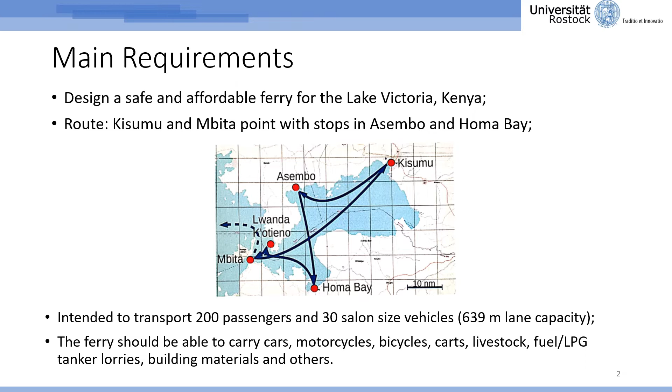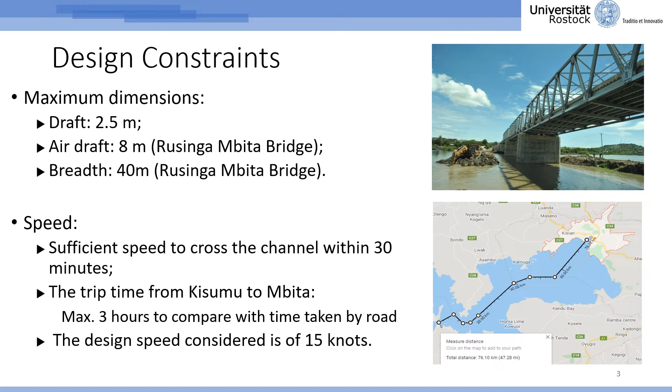Some restrictions also come from the lake infrastructure: a maximum draft limited to 2.5 meters, a maximum air draft and breadth of 8 and 40 meters due to restrictions of the Rusinga-Mbita bridge. The speed of the vessel should be enough so it will be an efficient alternative to the conventional roads. Thus, the design speed has been considered 15 knots, taking into account the accelerations and decelerations of the vessel.

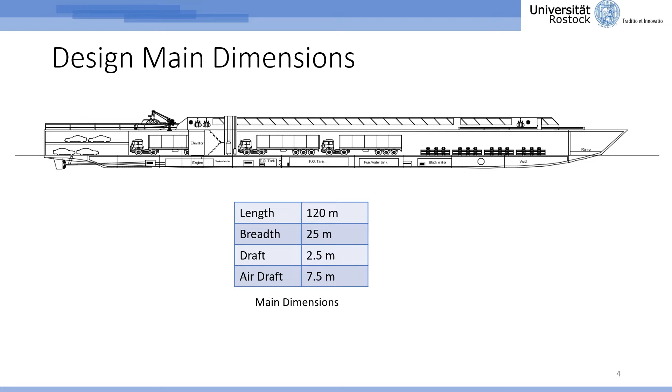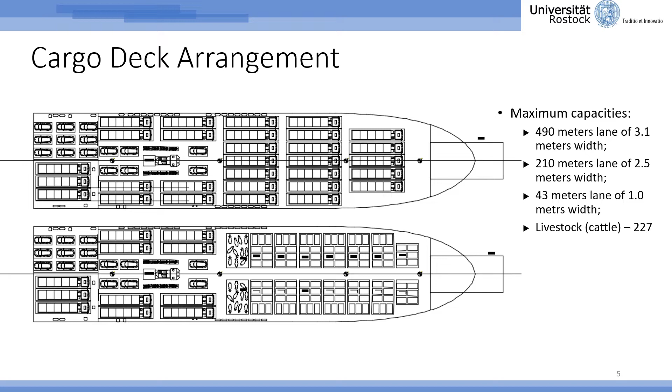The main dimensions were selected according to existing vessels and with the configuration that allowed a multiple-purpose cargo configuration. The vessel length is 120 meters, 25 meters breadth, and 7.5 meters air draft. The cargo deck allowed different configurations to be achieved. In the upper picture, a configuration is exemplified where mostly trucks are transported, and for the lower, the cargo deck has been adapted for transporting livestock, which could also be utilized to carry bulk materials, as an example. Thus, the flexibility of the cargo configuration improves the financial benefits achieved by the ferry.

A hoistable intermediary deck is present in the aft part of the vessel to be utilized when a larger number of smaller vehicles are being transported. This additional feature allows a larger cargo area even when the ferry is fully loaded with leisure passengers.

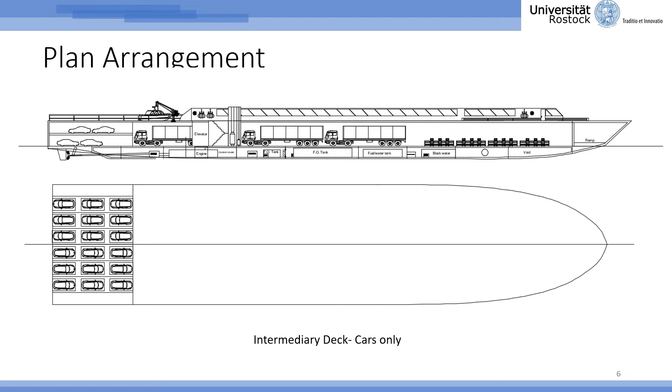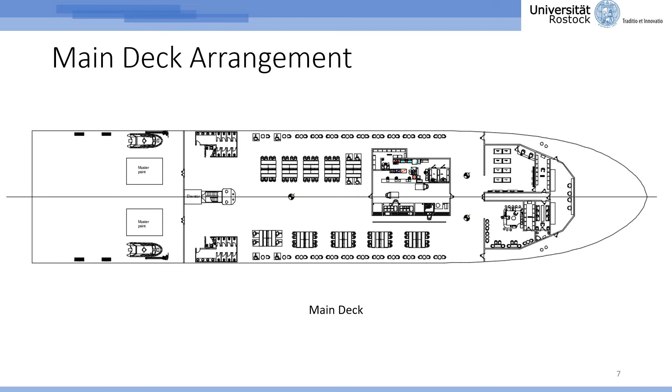The main deck is fully accessible to wheelchair users. It has 2 toilet rooms, a restaurant, a bar, and a duty-free store. Also, the crew cabin and deck are restricted from passenger circulation to optimize the vessel operation. Life-saving appliances are located both in the aft and fore part of the ship to allow a quick and efficient evacuation if necessary.

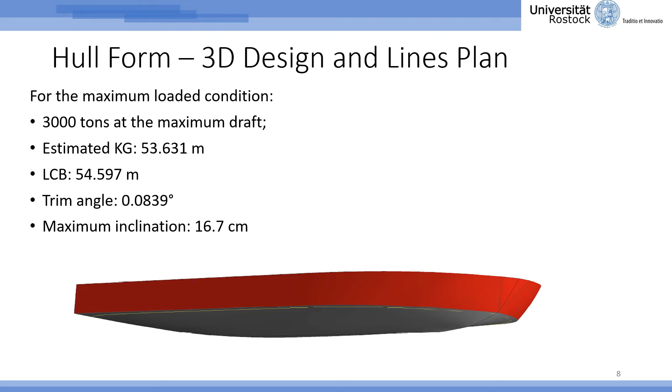With the final weight estimation and center of gravity positioning, it was possible to perform final adjustments to the hull form, getting values close to the estimated. For the loaded condition, the center of buoyancy of the hull is close to the center of gravity, thus the ship operates with a very limited trim. The hull was also designed to be as simple as possible to ease the manufacturing procedure, and from the 3D model we could draw the lines plan.

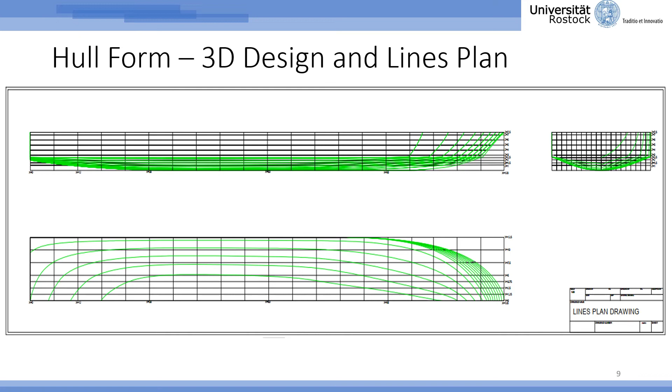Once the hull form has been set, the intact stability was verified for all the criteria specified in the IS code, and for all the loading conditions the results were compliant. Considering a compartmentation with 3 longitudinal bulkheads, 1 going through the center line of the vessel and 2 with an offset of 8.5 meters, and 11 transverse bulkheads, the probabilistic damage stability has been calculated with MaxSurf, with the attained index being above the required, even for the partial cases.

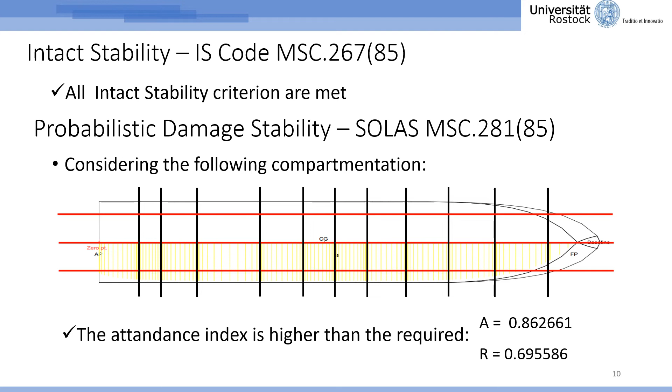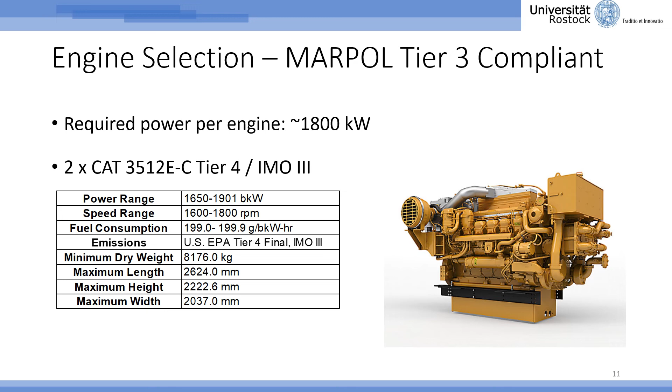The total resistance has been obtained from a potential-based software, and estimating an efficiency of 50%, it was possible to estimate the required powering of the ship. To reduce the dimensions of the engine and the fuel consumption, the required power has been divided into 2. Thus, a Caterpillar engine compliant with IMO Tier 3 is selected with a maximum brake power of 1900 kW and with geometrical dimensions that allow the installation in the lower deck, since the maximum height of the engines will be 2.2 meters. Based on the weight of the vessel and the local economy and salaries, the price of the vessel would be around $4.5 million.

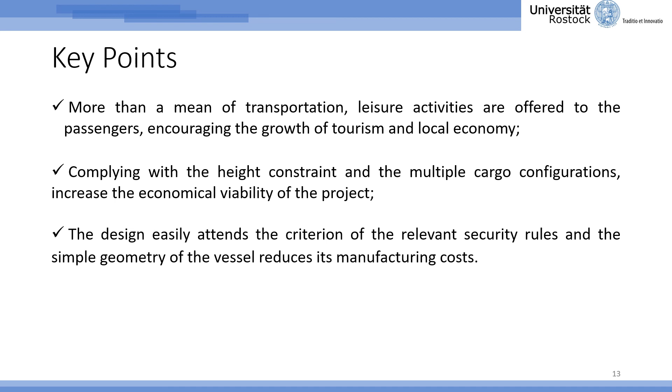To end this presentation, I would like to reinforce 3 key points of our design. The first is that we wanted it to be more than a means of transportation, with leisure activities offered to the passengers, encouraging the growth of tourism and local economy. Also, complying with the height constraint and multiple cargo configurations increase the economical viability of the project. The design also easily attends the criteria of the relevant safety rules, and the simple geometry of the vessel reduces its manufacturing costs.